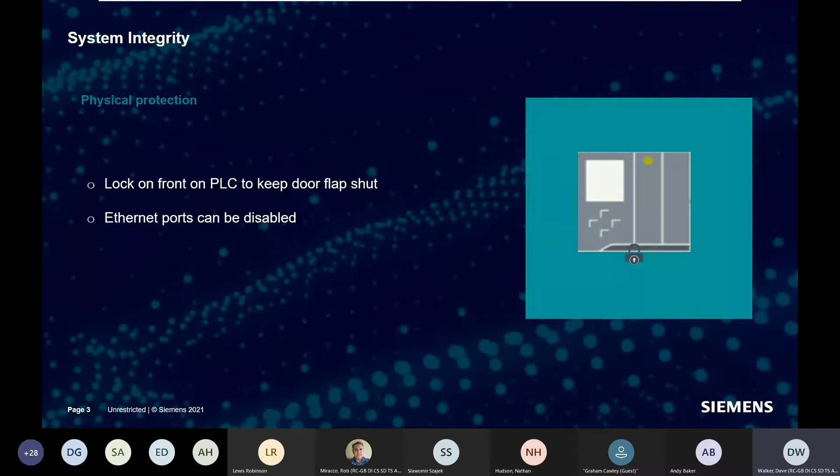We're then going to look at password protection. So we can password protect engineering operations onto the 1500, whether somebody can come in and take remote control, view the web page and everything like that. We can put access control on that. And we can even have access control for HMIs that want to connect into the 1500.

So we will look how we set that up and the changes we can make, and also we can change this from the program as well. So we can decide whether we want these accesses to be allowable from the program, not just at engineering time. So we're going to go through that.

We're going to look at if somebody does get into the 1500 as a further example of defense in depth. What you can then do is you can actually protect the individual code blocks inside your 1500. It's quite common that people who put a lot of effort into writing code blocks will protect the block anyway, but it can be part, again, of your defense in depth cybersecurity, that you can actually protect the code inside the PLC so that even if someone gets in, they can't make changes or they can't see how the program is operating. So we have the capability to protect the code inside the PLC.

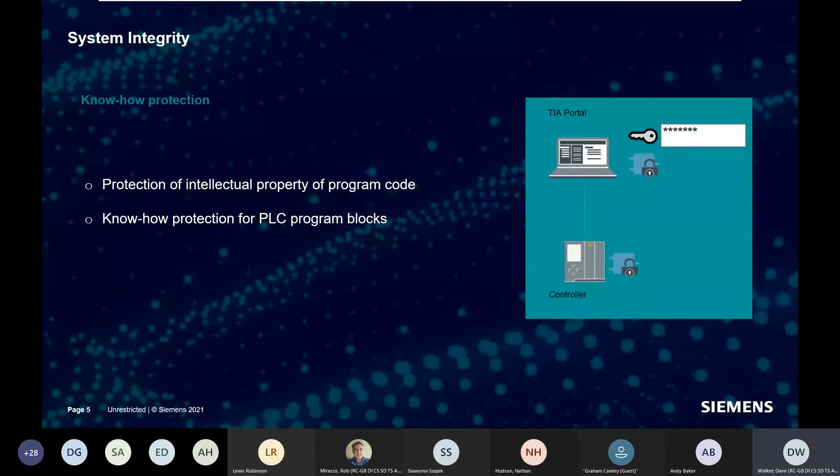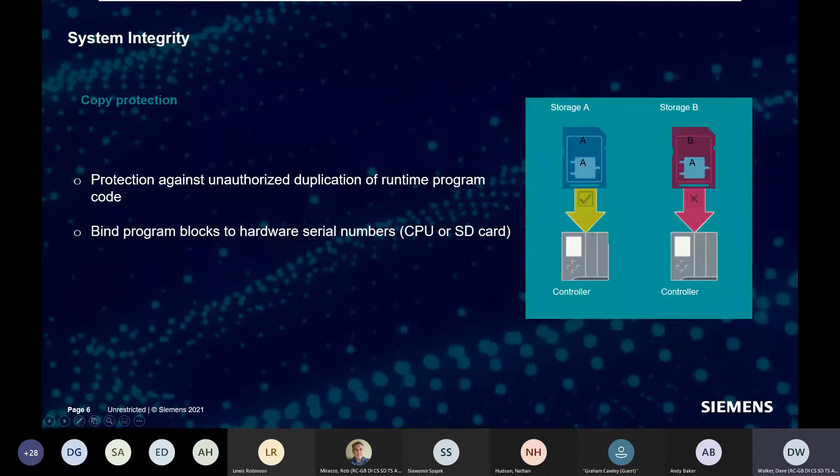And we can also bind the code to the PLC. This can be bound both to the memory card or to the actual PLC. So if someone tries to copy the code, they may be able to copy it if they've got through all the layers of protection, but then they can't actually run that code because it is bound to a specific memory card or to a specific PLC. So it just means that code can't be copied and then used elsewhere.

And then finally, what we're going to come on to is how do we communicate in a secure fashion. So this is passing data either up to a PLC, up to a PC, so maybe up into a factory system, so into a MES or an ERP, sort of factory management system, or even between PLCs. So we can do this as well in a secure fashion, and means that the data can't be changed, and also can be encrypted so that people can't read that data either.

Only the intended recipients will get the data, and they can also see that it's come from the PLC they thought they were talking to. So let's go and have a look at some of the setups and how we actually achieve that inside the TIA.

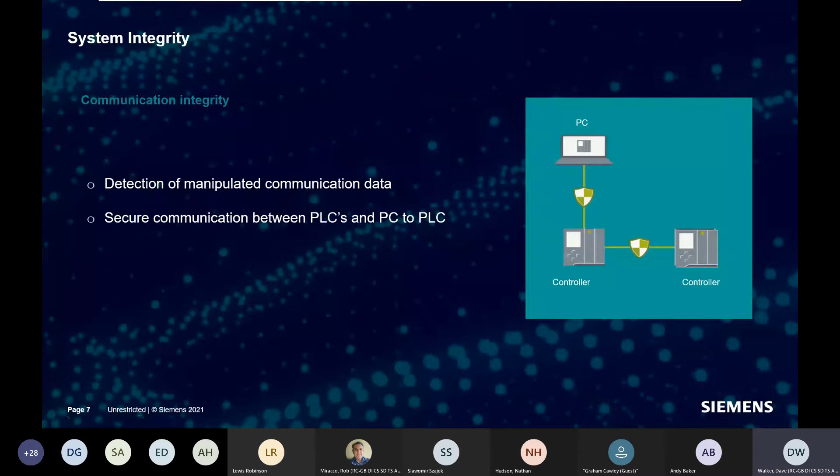So all I've got here is I've put in a basic project, I've put in a PLC, there is no protection on here. So I'm just going to go through some of the mechanisms that we can use to protect. And probably the most important, that probably most people don't do, being honest, is straight away into protection on here. We have the protection that we can set up. So this is enabling different levels of password access into the PLC.

So by default, we would have full access, and I would guess probably 90% of PLCs, when I look at them on customer sites, they're just left on full access. So anybody can go in, anybody can make changes, anyone can read the data, any HMI can connect to that data. By setting it up and moving it to no access, then the person has to know the different passwords to get to the different levels.

So even a HMI, you have to go into the connection on the HMI and give the HMI the password that enables it to talk to this PLC. So this is probably one of the best defenses you can just put on a PLC to make it secure, is just implement this password protection into your PLC. It then makes sure that even if someone's inside the network, if they don't know the password, they still can't get to the PLC. I've got it set at no access.

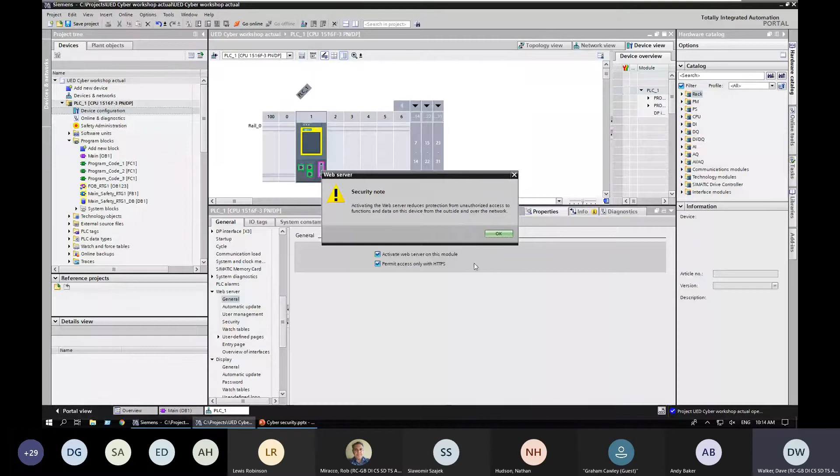You have to realize that by turning on the web server, you actually do decrease the level of security, because obviously it's another place that people can get into a 1500. But what we can do is we can activate the web server, which it will do here. So it does slightly decrease the level of protection on the 1500,

but then we can make this web server as secure as possible. So what we can do is we can permit access only via HTTPS. So this means that it is a secure connection from our web browser onto the 1500, so data can't be changed while it's traveling from the 1500 to the web page.

We can set up users. So at the moment, by default, it's set up for everybody as a minimum. Minimum basically means you can get onto the front page of the web server. And then what most people do, again being honest, is they go through and they tick like this, and they go, right, that just means anybody who now logs on to my 1500 can do anything they want. Again, not recommended.

What we would recommend is that you put a user in, and when we go into my other project, you'll see that I've set one up as an admin, as a diagnostic user. So this enables the user to go in. He can query the diagnostics. He can look at everything, like I might enable him to read tags, but he can't actually write tags. He can read watch tables, but he can't write to watch tables.

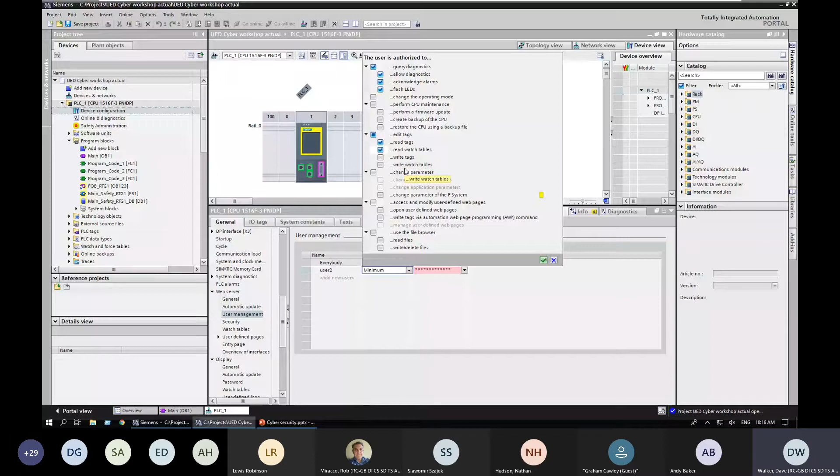And I don't allow him anything where he's going to be actually able to write down onto my 1500. So it just makes the web page as secure as it can be. So if I tick that, put the password in. That would enable that user then to log in, and we'll see an example of that when I go to my made-up system.

So that is the sort of hardware setup of a PLC, and hardening it up, where we've set up a password to get into the PLC. We've set a password onto the display. We've disabled any Ethernet ports that we're not using, and we've set up the web server so that it is allowed, but in a secure fashion.

So what we're now going to look at is actually program code. So if you want to further protect, because you've either got a lot of intellectual property inside one of these blocks, or you just want to make it so even if somebody knows the password and they've got into the 1500, they've then got to go a stage further to actually look at the program code. And this is very easy.

All we do is we go in and we can select know-how protection, and then what it asks for is a password that we put in to enable know-how protection. And that block now gets compiled up, and then it has a little lock symbol on it there. So that block now, if I want to open that block in the future, I need to know that password.

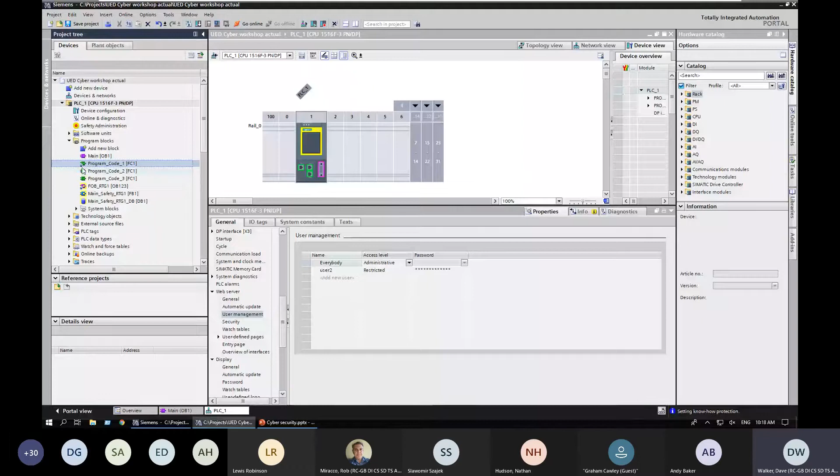So one thing that you will pick up from what I'm going through here is that it is important that you have a password strategy, and you probably use something like a password manager to store these passwords for you, because there is no backdoor to these passwords. So if you lose this password, then it is not possible to get back into that block.

So just be warned. I will recommend that you use a password manager or something like that to keep track of these passwords, because we do not have a way of getting back into that block if we lose the password.

A further thing that we can do to our block, if we right click and go into properties, is under protection, we can put on binding. So this is where we bind that block to either the serial number of the memory card, or to the serial number of the CPU. Okay, so if I say I want to bind that,

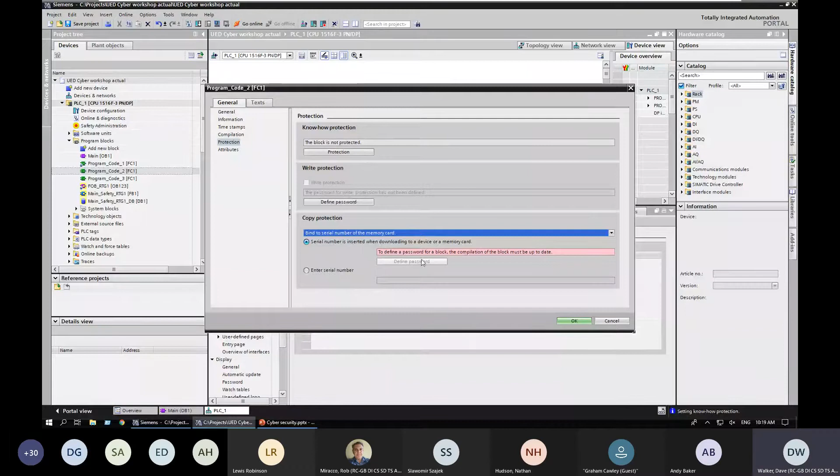I've not compiled it, it's probably because there's no code in it. If I compile a block, no, it's because I haven't put any code in it.

But if you just go with this option here, when I go to download that block into the PLC, it will automatically take the memory card number, so you don't have to. If you have the PLC available and you have the memory card there, you can just say on this download, bind it to that card.

That means if the person comes along and then does an uplift out of the PLC, it will have that binding to the memory card. If you actually want to protect it in the project, what you would do is you would enter the serial number here. So you would read the serial number off the memory card, you would bind it to that, and then you would know-how protect that block so that they couldn't then get into the properties of that block to be able to change that serial number.

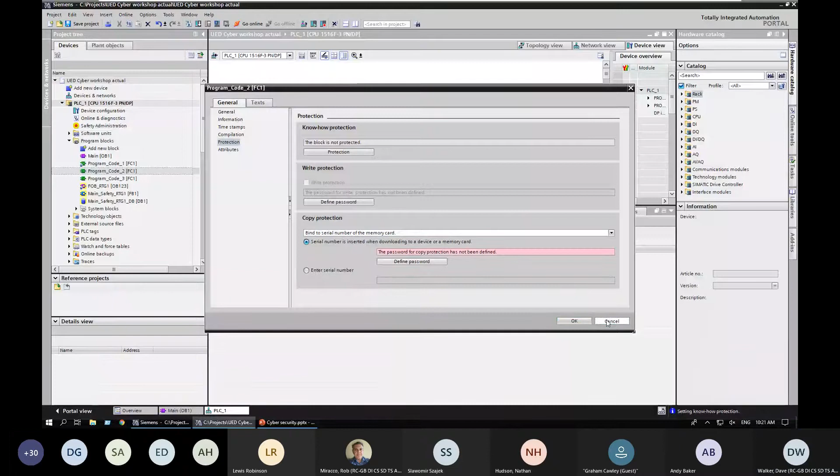So it just depends. If you've got the hardware available, you're just doing a download and you don't want people to be able to uplift the program out of the 1500 and run it on another PLC, then this is the option for you. If you haven't got the actual hardware, but you've got the memory card number, you can put that there. Again, put on the know-how protection to stop somebody being able to go in and look at that or change it. So that's binding and looking at all of the uses.

As you've seen, I've been putting in passwords and I've been changing my project, and everything that I've been doing so far is to protect the actual PLC and code while it's in the PLC and while it's being used. But we have also got this project, and there is an inbuilt mechanism to actually protect the project and give people different rights while they're using the project. It's also necessary to use this for setting up communications and OPC, and the certificates that we use to ensure that our communication is done in a secure way. So there is a setting down here inside TIA called security settings.

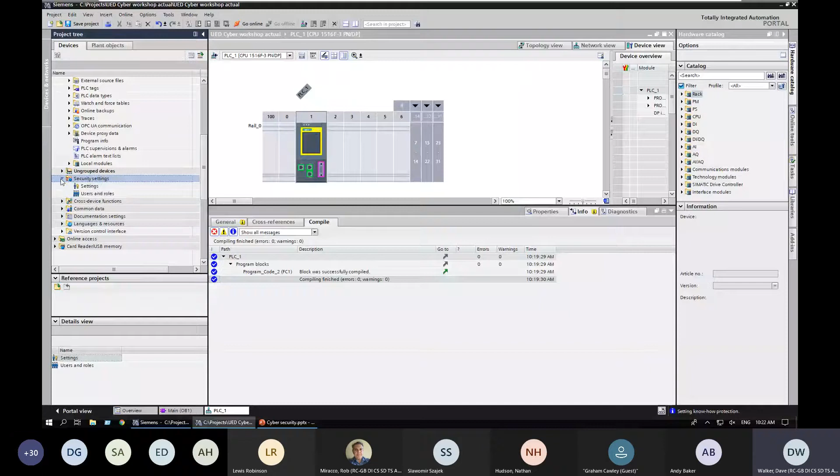If we go into that setting and we click this button, it now asks us to create a user and a password. I use a standard user for myself because I do a lot of this sort of protection. So inside my projects, if I have a protected project, I know one of my standard usernames. That means that I can get into the project, because this cannot be undone. Once you've protected a project, you cannot then remove that protection. So to now get into this project, once I press save and exit, I would have to know that username and password.

Now we've actually created that. I've created my standard user. Inside here, we have some pre-built standard roles that have been set up. We can actually go and have a look at this. So we have an engineering administrator, and we allow an administrator to open the project with read write. We might create a diagnostic engineer, because the engineer can still open a project with read write. So we might want to have a maintenance role.

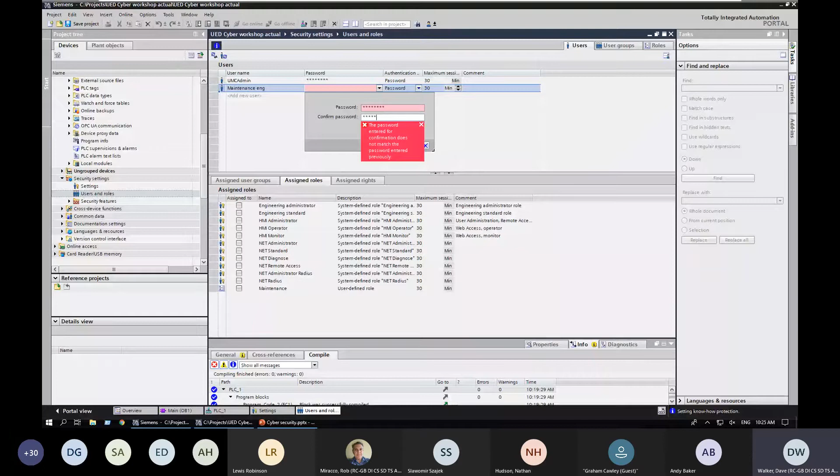It would help if I could type. And I haven't got an uppercase character. It's one way of filling the time up. Not type passwords incorrectly.

There we go. So I now take that user and I assign him to the maintenance role. So that means now that even on my programmer, when I open the project, I will be now given the maintenance, and I log in as my maintenance engineer. I enter the password, and then that will only allow me to do what is defined by the maintenance role, which, as we've already seen, is it gives me read-only access into the project.

So what we've also got in here is if we have a CP card, which is an inbuilt firewall, we can actually set up the firewall, which is direct onto the PLC. So that's what Andy was going through, but he had a separate firewall. We can build the firewall onto this PLC. We can set up VPN through the CP. We can set up a time server on here as well. And we have a certificate management, which is what I'm going to come on to now.

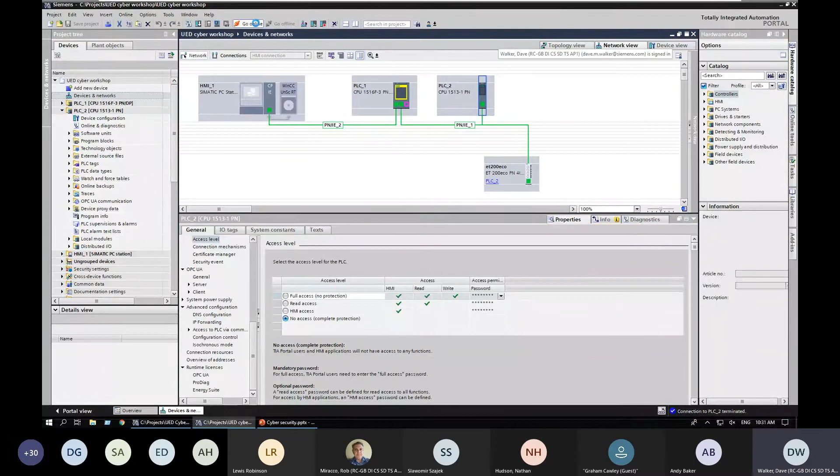If I go into devices and networks, if I click in that, and ask to go online, it's now asking me for my password to go online. So it's a fully protected project. Once we're online, if I go offline, and then I ask to go online again, it will just take me straight online, which was the problem that I had before.

It wasn't timing out. So that's just to show you that if you put this protection on, it's not a constant entry. I've entered my password once to actually come into the project, and then I've entered my password once to go online to the PLC. Security always makes things slightly less easy than if there's no security, but we're getting all the benefits of protection if someone is trying to cyber attack into a PLC.

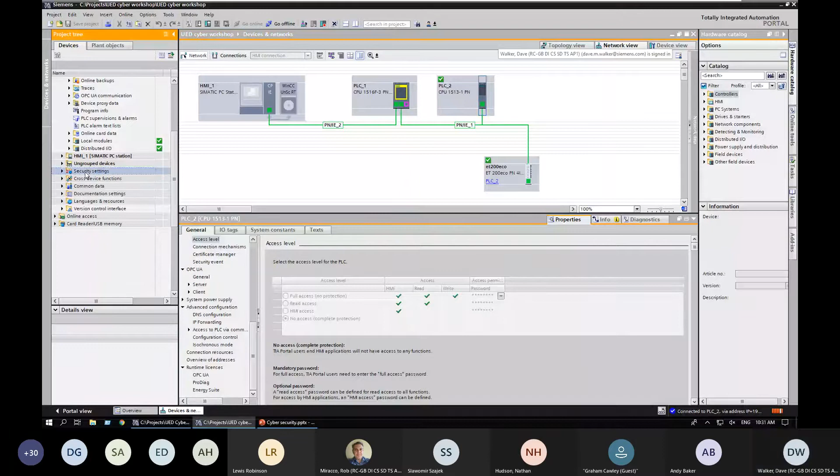What I have set up, as you've seen, it's a protected project. So in my security settings, I have got some users. I've built a user, which is OPC user 1, and this OPC user has the assigned rights that in runtime, so it doesn't have any impact on engineering, they are allowed access into OPC clients and servers. So they have server and client access on both PLCs.

So this is a really simple way, without having to remember users and passwords everywhere. You can put one user in and you can assign them rights across your projects. Because what we're going to look at now, if I go offline to here, is how we can do communications in a secure fashion between a separate piece of plant, so a factory system, maybe another SCADA or a MES or something like that, down onto a 1500 if we've turned off PUT/GET, because this is in no access.

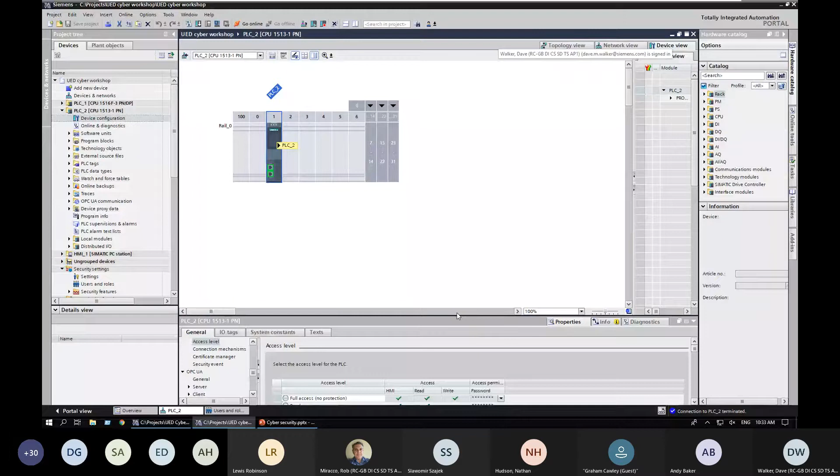So the mechanism that we're going to use is OPC UA. So we're going to set this PLC here as an OPC UA server, but we're going to make it secure so that people can't just browse onto it with any client. So what I've done is I've activated the OPC UA server on this device. I have turned off the standard interface, and I will show you this when we browse into this PLC. By default, this standard interface is turned on, and by leaving it turned on, what you in effect do is open up all the data inside the 1500 to your OPC UA client.

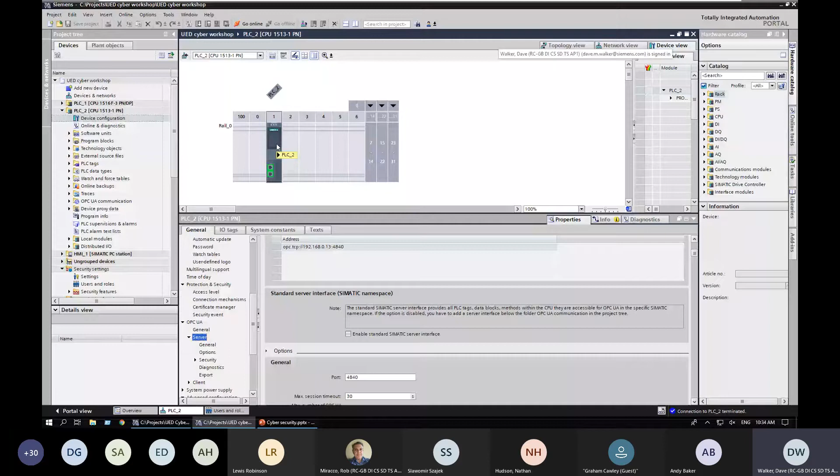It can go in, it can look at all your inputs, all your outputs, all your data blocks, if that's what you've set up. So the recommendation is that by default you turn that off, and then you build a separate server interface, which I'm just going to briefly show you how to do.

I have left it all at standard default rates. It has created its own certificate, so it's created a certificate for the server. I have turned off all but the highest level of encryption and signing of the OPC server. So I've removed any no security and lower levels of access.

My external application has its own certificate that I have imported into the PLC. So by importing this, I've said that this is a trusted application that I trust to come and read my data. That has come out of the OPC client application. That again could be SCADA, could be your MES, could be your IT supplying you with that certificate. You put it onto the PLC.

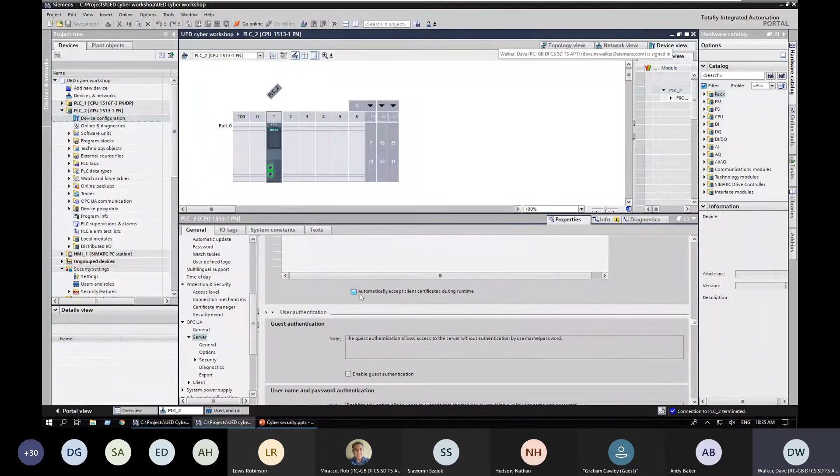I've disabled accepting any other client certificates, so it's only looking at that client certificate. And I've said to come in and use me, you have to have a username and a password. So there are 2 users and passwords. I've set up another one here called admin, but because up at the top I've also said enable user management via the project settings, I've got that OPC user 1.

So because I've set all that up, if we now go to my client application, I open up my client. If I go first of all to my unprotected PLC, the one that I've done no security on, I can simply select none. It connects into the PLC. I tell it to go online. It's gone straight online to the PLC.

I can go into the PLC. I can go into global data blocks, I can get all the data. I can go into instance data blocks, I can go to all the data. I don't think I've actually got any inputs set up, but if I did, I could go to inputs. I can go to the memory area of my PLC. I can bring that in because there's no protection on this. I can turn it on and I can write data into my PLC.

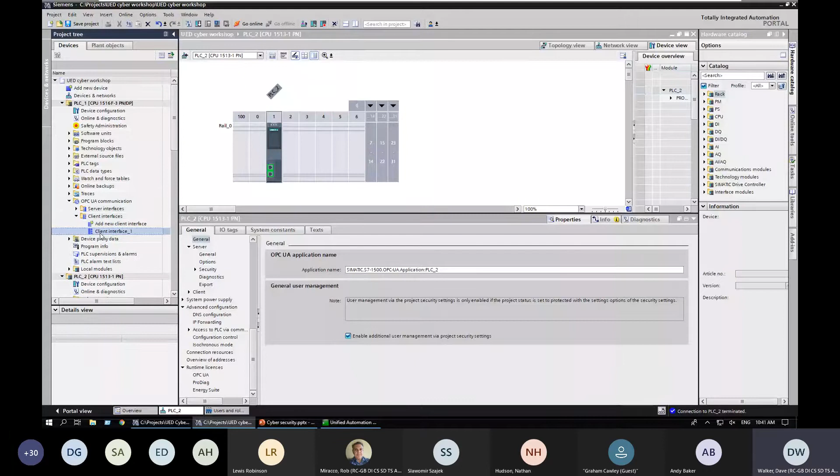And what I've done here is I've set up a client. So on my client of my 1516, I've said I want to read data. This is set up in a very similar way. We can go online access. So I want to go to 192.168.

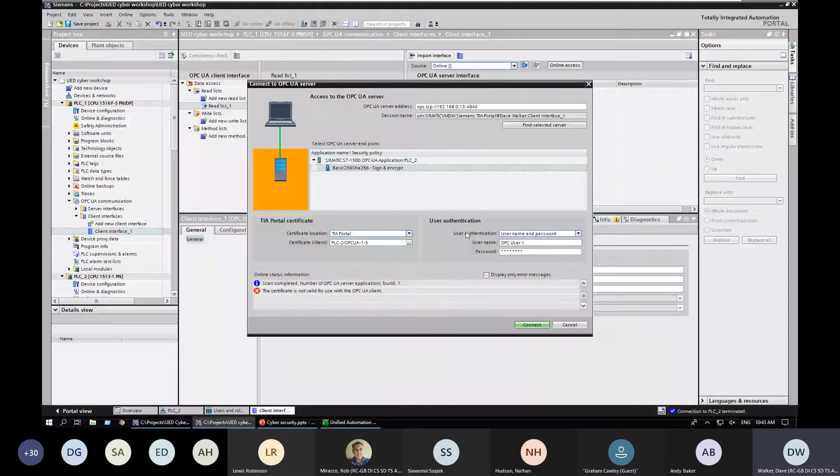So the setup, I've used the wrong certificate here, but if I had picked the right certificate, it would have connected on, and then what it would have allowed me to do is just drag and drop values out of the setup. And then also inside here, I have actually set my security up. So what you can see, I've set the same security, OPC user 1. I don't need to know the password because the OPC user password is set up through the entire project. So as long as I put in OPC user 1, it will allow me to connect. So it's the same setup here that I made in my Unified Automation client project.

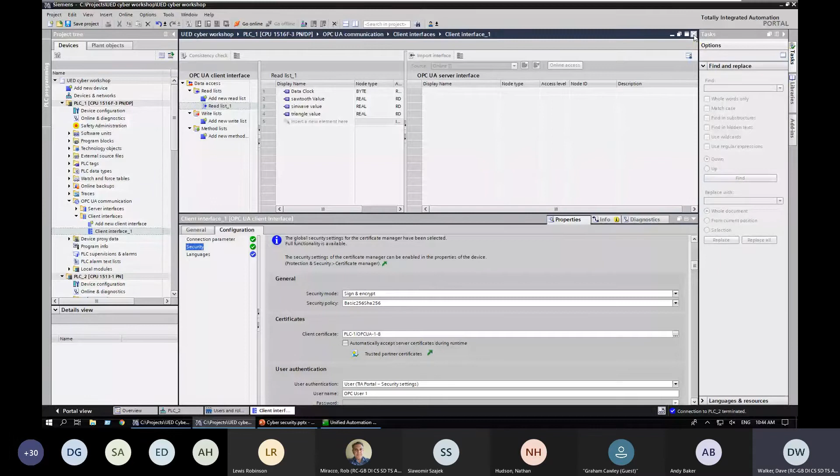Once you've set that up, you can then pass data in a secure fashion from PLC 2 to PLC 1. So that's using OPC. OPC is very, very secure, as you've seen. However, there is one disadvantage that most people see. If you want to use OPC, it is a licensed option on the 1500. So you do have to purchase a license for each of the PLCs which are acting as either a server or a client. So people also want to pass data between PLCs in a certified fashion, but they don't want to use OPC and they don't want to use put-get because that's insecure.

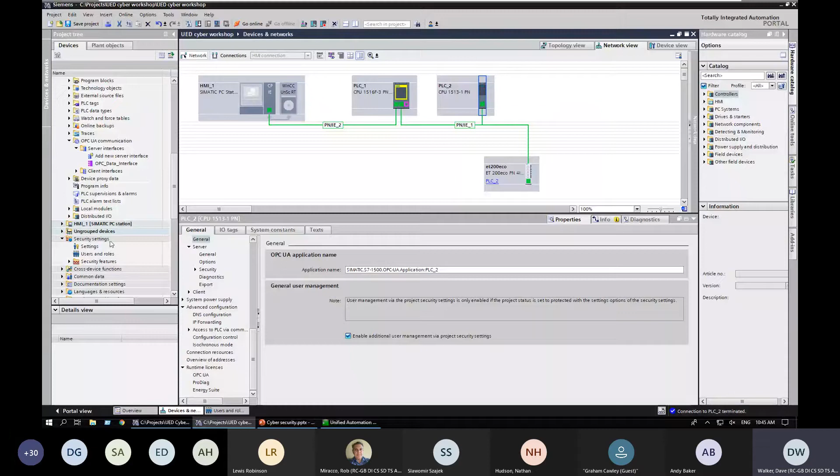So we do have a second method of passing data between PLCs, and it's called Open User Communication. Open User Communication now allows you to set up a secure connection between 2 or more Siemens PLCs, and it's all done inside TIA and it's all integrated in. So for this, we have to have a protected project to enable us to do this secure communication, because to fully make it secure, we have to use certificates in each of the devices. And we only get access to our certificate manager if we protect the project.

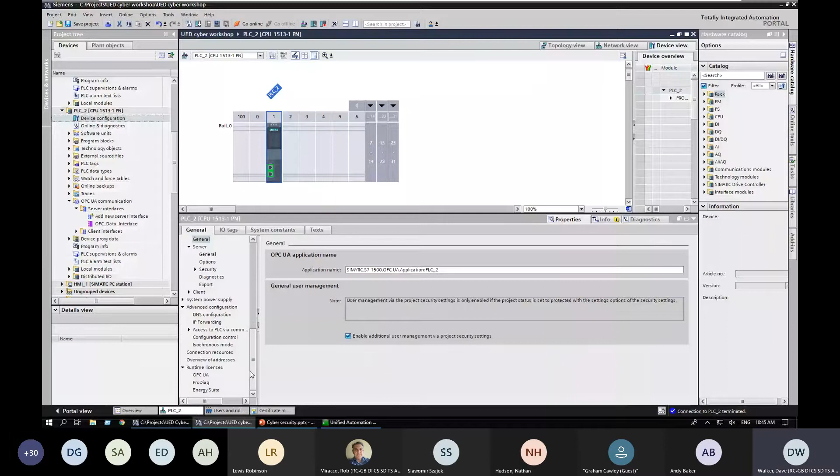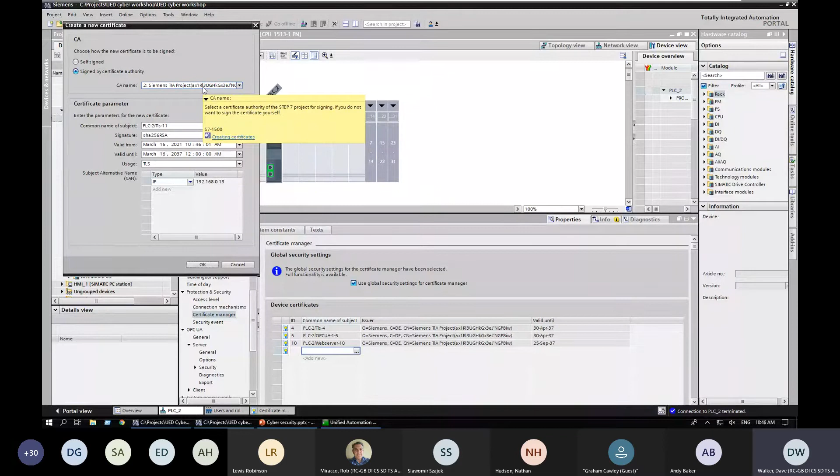So what I have actually done is I've set up my certificates. So where do we set up the certificates? If we go into our project and we go into the configuration, what you will see in here is on each of the PLCs, we have a certificate manager. I can click in and I can add a new certificate. So as part of every TIA Portal project, it comes with its own certificate authority. I'm not going to deep dive on certificate authorities, because that's probably an hour in itself, and this is just an overview. We can run a further session if you want me to fully go through certificates.

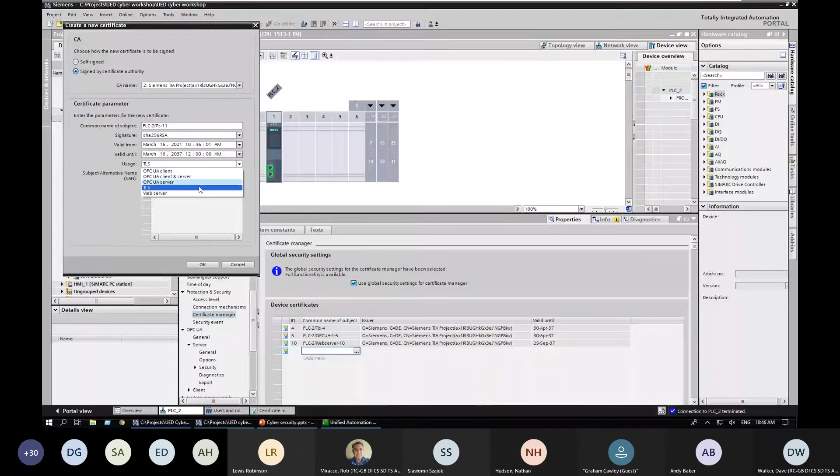However, I am going to create a certificate based on this project's certificate authority. You can create an OPC client and server certificate, which is what I created for my other. I can create a web server certificate, and I can create what we call a TLS certificate, and this is the one that we use to do the communication between the different PLCs. I'm going to cancel that because I don't want to create a new certificate.

But if we go back into our global certificate manager, what you can see here is they've all got a number on them. So we have used number 2 as our certificate authority. And then on our devices, I have got a number 3 and a number 4, where 3 is the Open User certificate for PLC 1, and 4 is the certificate for PLC 2 for Open User Comms.

We then use the standard Open User Communication block. So anybody who has done Open User Comms, it is a standard block that we have, which is a send and a receive. We have a send on one end. This is the receive end. So we can see here that we have our block. On the receive end, you simply say that you want to enable it to receive and you want to connect. So this is all you have to do on the receive end.

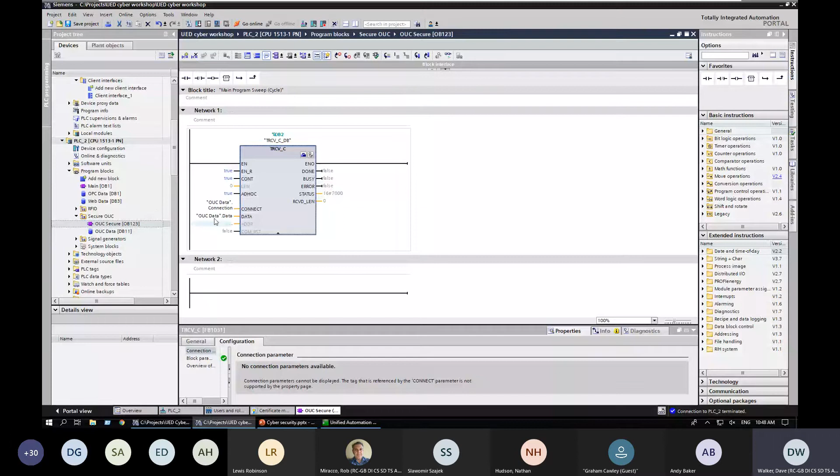You then have a data block where you store the connection details and the actual data that is being transferred. So if I go into this data block, if you were doing standard open user comms, you would just use a format of data which is TCON IPv4. Because we want to do all this securely, we are using the secure form. So this is a pre-built, you type that in and it automatically brings you this down. These are the standard parameters. So this is where I am putting in the IP address of the PLC that I want to talk to.

So it's very simple. As I say, we can run a seminar and we have already run tech talks on setting this up. However, today what we're looking at is the secure form. So it's got these additional bits of data. It has got that we want to use secure communication. And in this particular PLC, number 4 is my certificate, which when we were in the certificate manager, you saw number 4. And we are using the certificate authority number 2. This certificate was created from this certificate. So you just put 4 and 2.

If I go to the other end of the communication, if I go into my secure open user comms and I look at the data block, what you can see in here is that I'm using the same certificate authority, which is number 2, and I'm using the certificate in this PLC as number 3. So those came out of the certificate manager. You just go in there, you create your TLS certificate, it gives it a number, and this is the order that you put them in, and that then forms up that communication.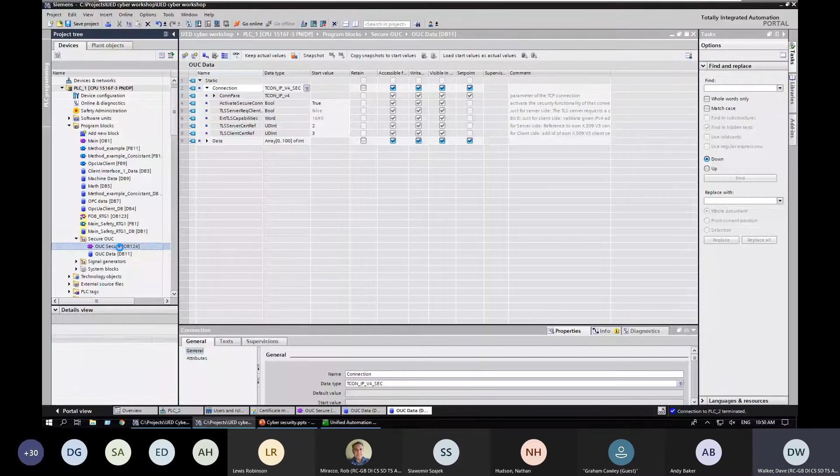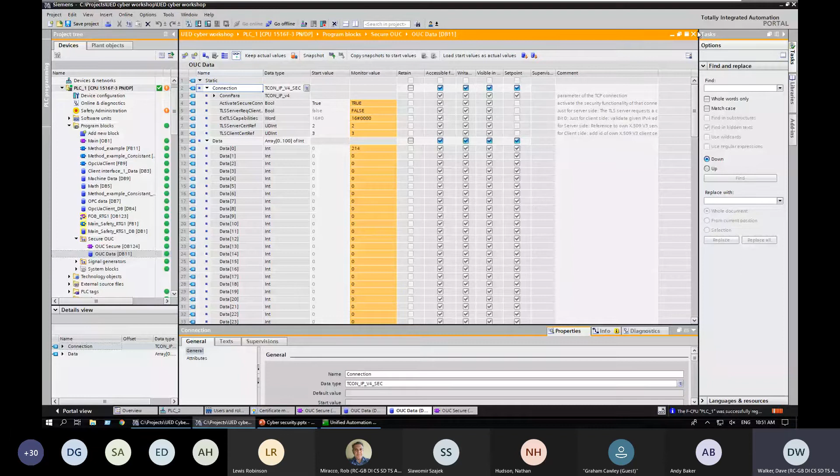So what we will see, if I actually go online, again, this is an insecure PLC, so it didn't ask me for it, but you can see that this is just communicating away, it's just going as fast as it can, and it's just sending data from this PLC. The data it's sending is in our data block, so I'm sending a couple of bytes of information here from this PLC over to the other PLC. So it's simply doing a T-send straight over to the other PLC, but this is a fully secured connection.

The 2 PLCs recognize each other. They've got the certificate set up, and say that the data cannot be changed between the PLCs. So the data that leaves here is the data that arrives at the other PLC, and you can't send it from a third PLC and pretend to be this PLC, because all the certificates and everything are set up.

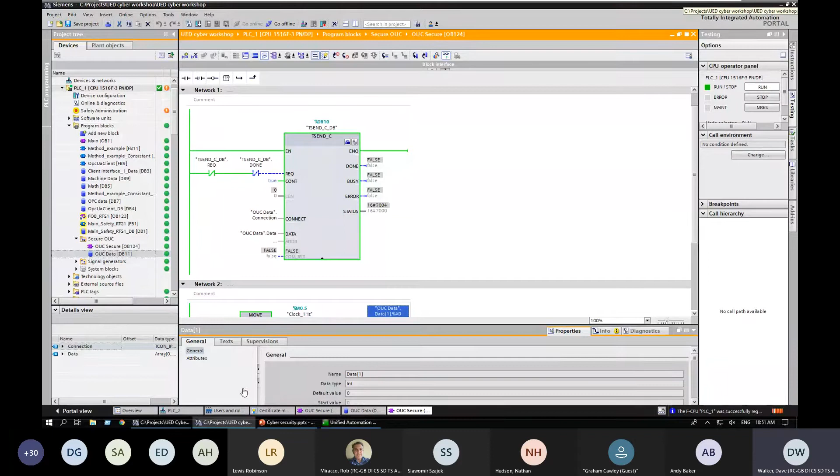So if somebody has tried to get in to the web server, you're getting that log on. You will also get told if somebody has tried to get in to the PLC but has failed.

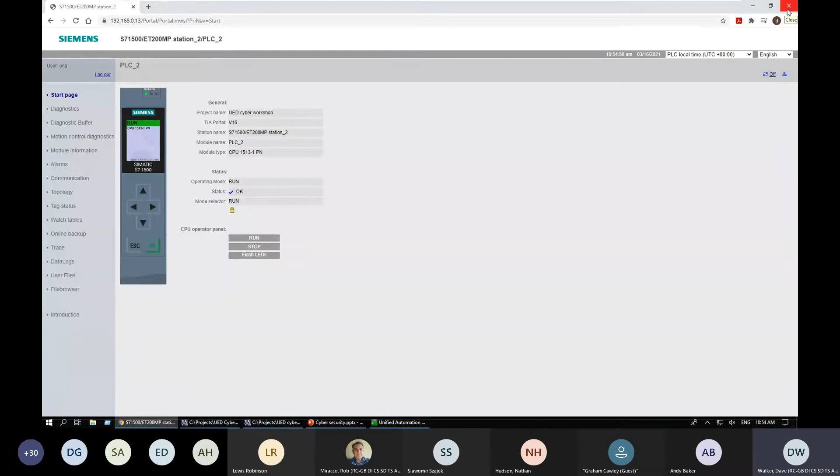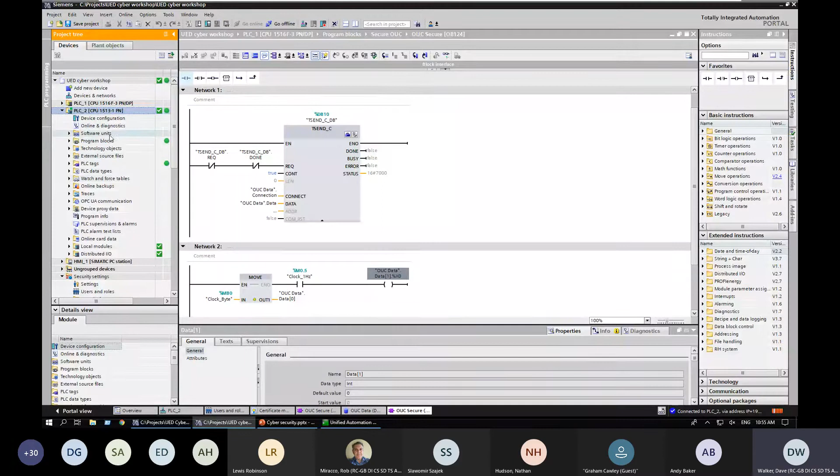And the final thing that I'm now going to show is how we can actually set this up so that it only works if there is, say, a physical action on an external connection. So let me just go offline to PLC 1. So at the moment, we've got PLC 2. I can go online because I've already put my username in. So you can see here that I've got online. I can go into my program blocks.

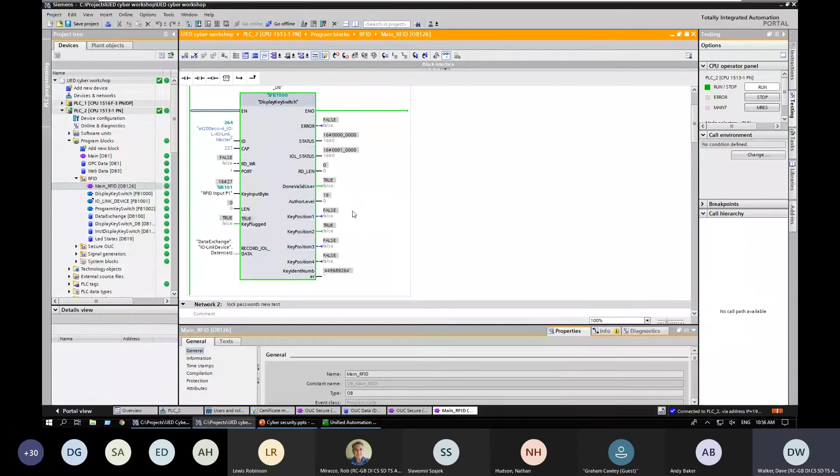I have got in here a bit of code. Let's go online to that. So this is a standard RFID switch that we have. It's a key switch which is driven by RFID. So I have to put an RFID key into the key switch. It's a little RFID chip. And then I'm allowed to turn the key switch to one of 4 positions, depending on the authority of the key switch. So what we can see here, this is an authority level of 19.

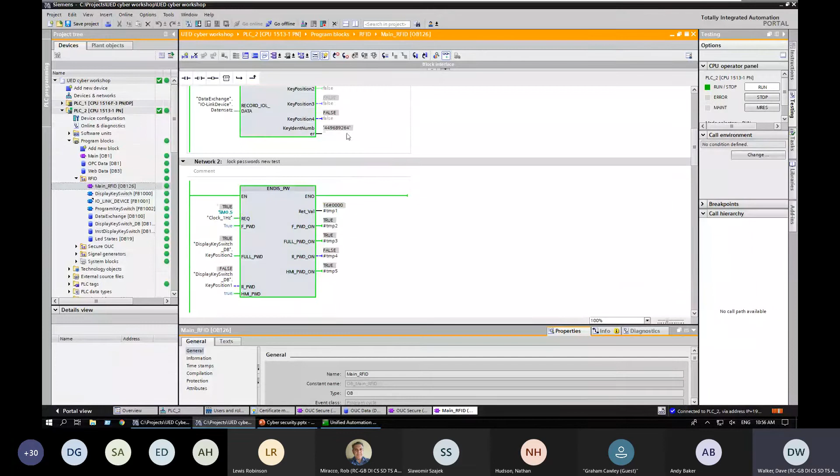It's a very high authority, so that I can actually move that to any one of the 4 positions, and it will turn on the key switch to the authority level it's been allowed. I've then used this inbuilt block here, which is ENDIS password. It's a standard block. And what I can now do is, depending on where that key switch is positioned, I can enable or disable the password. So you've seen I've typed my password in that allows me to have read-write access into this system.

So if I go offline now, and if I move that key switch or remove the RFID, if I now try to go back online, it's now asking me for the password. If I put in the password that I know should be good, because the key switch is not in the correct position, it's now telling me that the password is currently invalid on the device. So this means that remotely now, I cannot get onto that PLC. I have been locked out of that PLC. Somebody physically at the PLC or via an HMI has to allow me to get onto that PLC.

We can set this up so that, let's say, I can allow read-only access. So at the moment, you'll have to believe me because you won't see the password I'm typing in. But what I'm going to do is type in the read-only password. So it's let me put in the read-only, so I can now go on and do diagnostics.

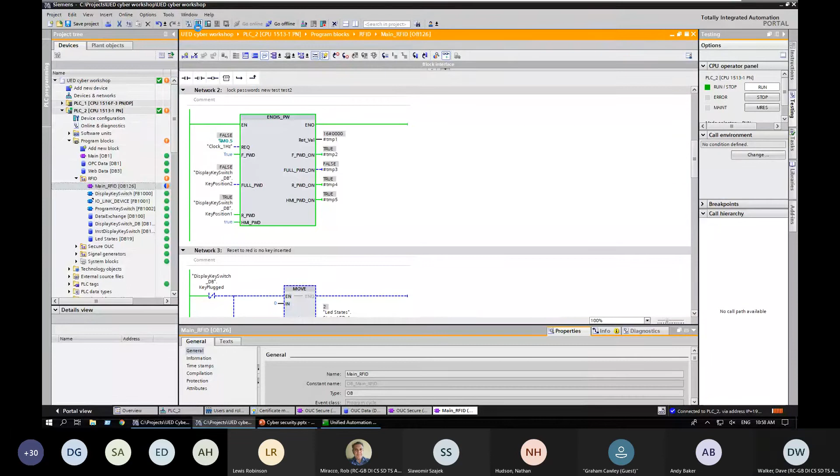If I was now going to make a change on there, and I said I wanted to download that, it will compile because that's been done offline. But now it wants the password because that was a read-only password that I gave it. So it's not going to allow me to download. And again, even that read-only password has been enabled by the position that the key switch is in. So what I need to do is move my key switch to the correct position.

I will now enter the... it's because I've changed the password halfway through. So let's just go offline.

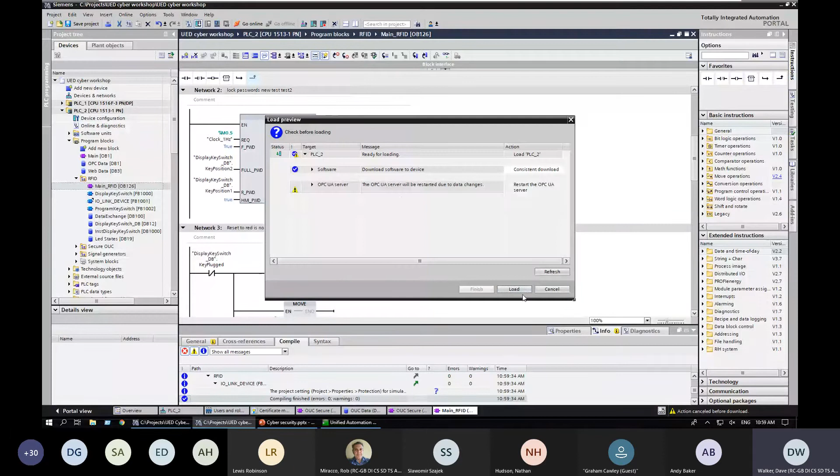Now go download. So it's asking me for my read write, and you can see now because I've entered the read write password, it will enable me to do that download. I can now go online like that because at the moment I am connected for read write access.

If I remove my RFID key, so I walk away from the project and I remove my RFID key, it automatically knocks me offline. So anybody coming up to a laptop can't now make a change to that PLC or download it. So it's a standard block. It's just inside our standard instruction set under program control, runtime control, ENDIS_PW there.

So it's just a way that you can further enhance the security on the 1500. I've done it with an RFID key; that could be a physical key switch on the outside of the panel. So again, if you've got remote access onto your site, but you don't want somebody just being able to dial in and then make changes on the PLC without your knowledge, you could have a key switch on the PLC that will block all the passwords until you put the key switch into a program position to allow somebody to make a change onto the PLC. So it's just a block that is further there to enhance it.

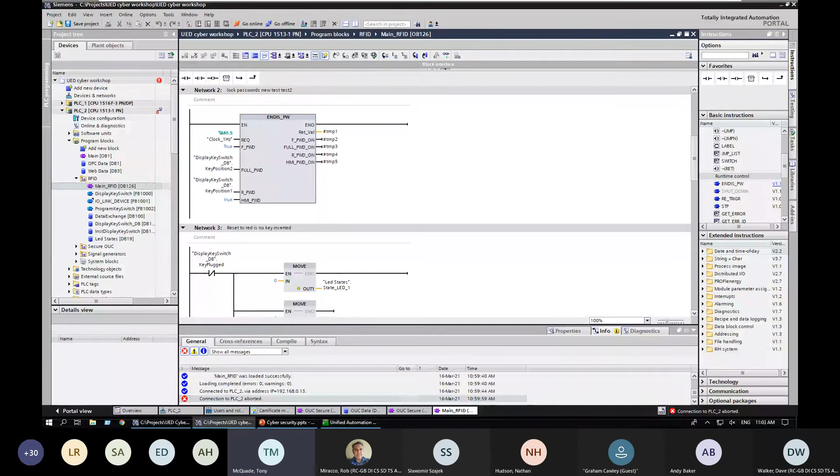Yeah, the only other additional one, I'm working on a project at the moment and the customer has, they may not know what they're talking about, but specifically asked for HMI hardening. So like you've shown us through the PLC there, are there options to block ports and enable security on the HMI? There are on a HMI; this was specifically aimed at 1500. But yeah, of course. I'll pass back to Ben unless there's any other questions, and then right at the end, if you just hang on, I will show you explicitly what we can do with the HMI, and anybody else who's interested can call. Okay, yeah, that'd be great. Thank you very much. Any other questions, or I'll hand over to Ben?

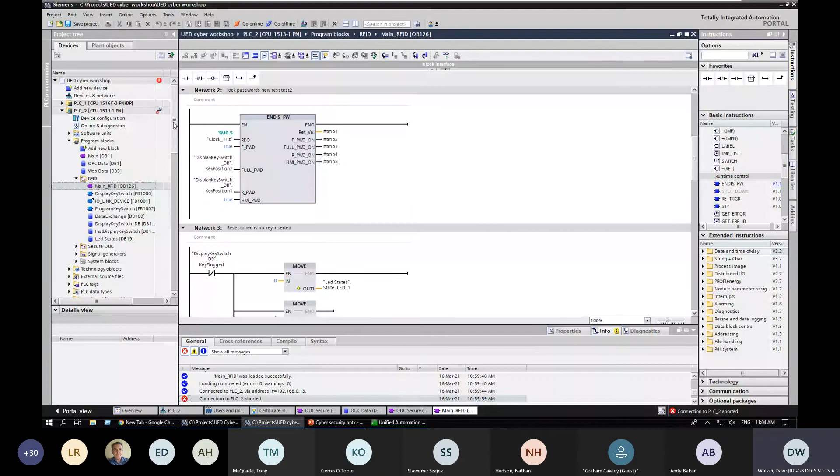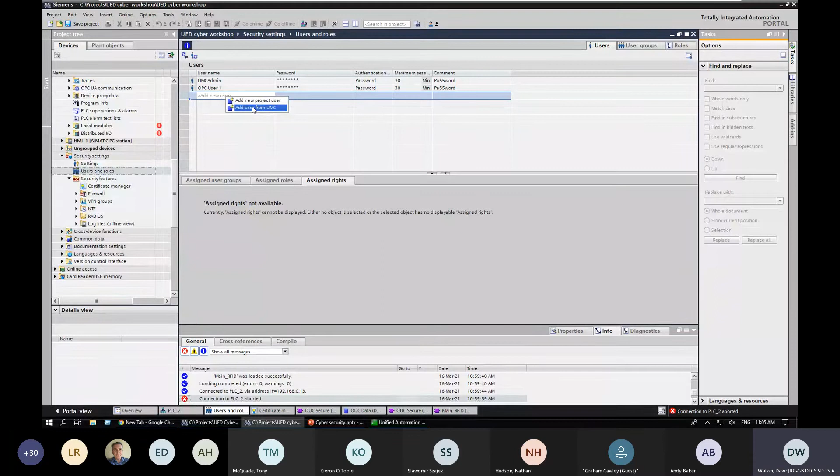Hi there, it's Kieron O'Toole here. Can you hear me? Yeah, brilliant. All I wanted to check was with the PLC hardening and any other hardening, is there any way of linking the password side to the Active Directory accounts? So right. I haven't got an Active Directory, but if I go into my users and roles here and I go to add a new user, we do have this option, which is add user from UMC. So the UMC is an add-on to TIA, and that is User Management Component. User Management Component will actually link the TIA into the domain server. So all the passwords and users and roles can be set up from a domain server.

Now, I haven't got full detail because we haven't seen it yet, but I have been told that this is going to be further enhanced in V17 to then be able to set up some of the usernames and passwords and access levels that I've been showing you today. You'll also be able to use the UMC, so the User Management Component, to set those up to link those into a domain server as well as part of the V17 update. But I can't fully commit to that because I haven't seen it.

So then at the moment, that's brilliant to hear, by the way, but as far as having a single username and password that's consistent across whatever applications are being used, is it that we could take the Active Directory and link it in through UMC and use that for the permissions right the way down to the PLC hardening? So you're referring to, for God's sakes, don't forget your password. That all sort of disappears at that once.

If you want to, you can do it all through UMC, which we can do at the engineering level. So all this, the setup of getting in to the project. So when you open the project, if you were logged into your Windows PC with your Windows username, it will actually automatically open that project if you're logged in correctly, because it would recognize you as a Windows user. As you're the user, you have access into that project. So all of that level goes away.

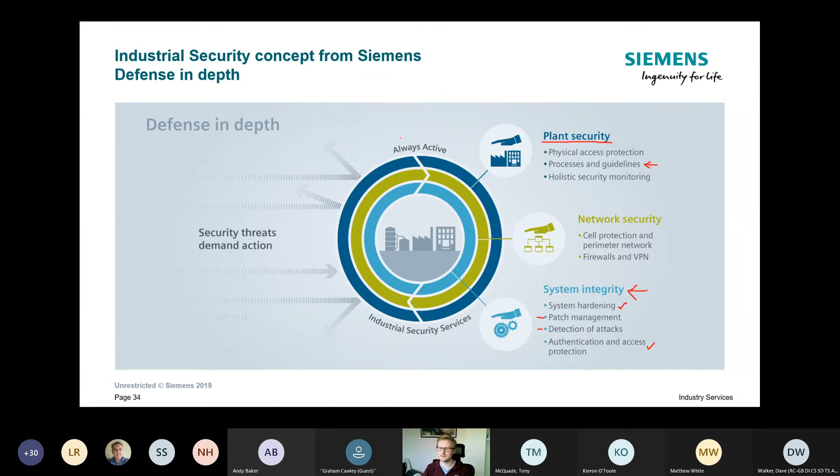So really what we're trying to say here is that there are a lot of different considerations to take when you look at building up this defense in depth concept, but really it comes down to having those independent levels of security. So this is quite a nice way of visualizing it and getting your head around the basic concept. What we're trying to do is move away from this idea of having one single layer of defense. So this could be air gapping a system, for example. We talk to a lot of customers where that's their default position when it comes to security and this single layer of defense.

It could be installing a single firewall, for example. But whatever that single layer of defense might be, the issue is that once you've overcome it, you're into that central part of your OT system and you're able to potentially deploy those threats. So that's where we have potential issues. What we're looking to move towards is a system where we've got, again, these independent levels of security, so that if somebody gets past your external defense, you've still got multiple other hoops to jump through to be able to get to the part of the system that you're aiming for. This is really, really going to deter those attackers.

So I also wanted to address the fact of why listen to us, why take on this idea of defense in depth, and I really wanted to explain where the ideas come from in the first place. So this defense in depth concept that Siemens has put together is directly based on an international security standard. So you may have come across it before, and if you haven't, it might be something that's worth spending a little bit of time looking into if you're interested in the security topic, and this is the IEC 62443 standard.

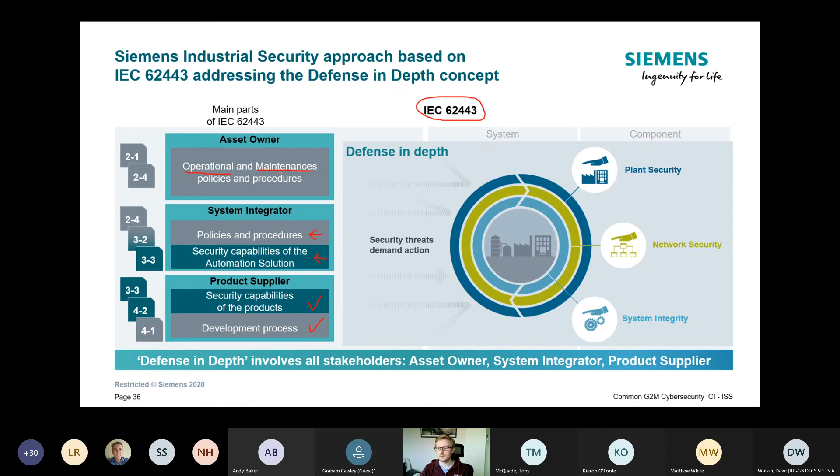So that was the first thing I wanted to point out, the fact that there are these three groups of people that all have to work together and all have to take their responsibility for security really seriously. The second thing is this idea that you can't just throw technology at the problem when it comes to security. And you'll notice here that policies and procedures have come out quite a few times in what I've been talking about. So a nice way to look at this is to kind of summarize the three main aspects that make up a secure solution and a secure security program.

So the technology is one part. Yes, it's really important. We've been seeing from Dave how you can implement some of these concepts, and you need that technology to be able to create a secure solution. Equally important are your processes around the way that your company and your design process as well is governed around security, but also your people and the training of, from the end user's point of view, the operators on the factory floor, the engineers who have access to the OT equipment, but also everybody else that's within your organization and could potentially have an impact on the security of that system.

So we wanted to explain to you how we're trying to make this easier for people to implement, because we realise that security is a topic that's been around for a while, but as we're starting to discover, there's a lot of aspects to it and there's a lot to take on. So we wanted to show you how Siemens are trying to make this as easy as possible. So we make this defense in depth concept real in two main ways. The first one is all about building security into those products, and that's what we've been hearing from Dave this morning. But on the flip side, we also have a team, which I'm part of, which is there to really support customers on this topic of security. And we're there for a few different reasons.

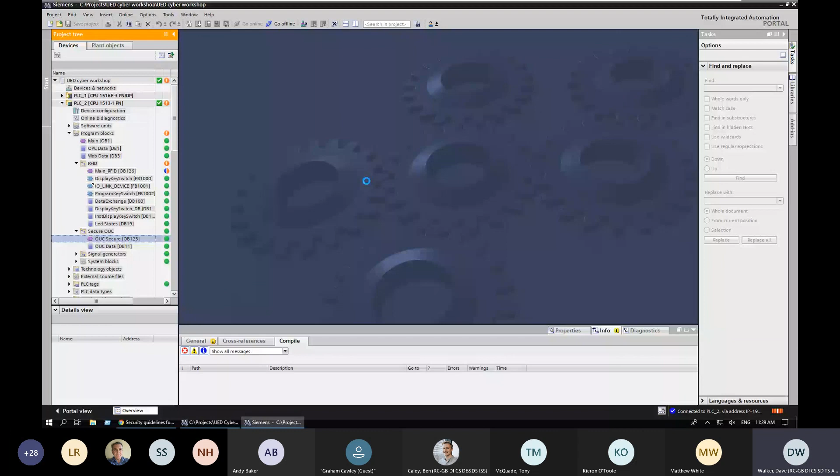I can't actually, as a maintenance user, change a block anyway, because I have read-only access. I can still go into a block, and I can go online to a block, so I can do diagnostics. I just can't make any changes to the blocks, and I can't download a changed block. But as a person who's only got read only, I wouldn't be able to change the block anyway, because everything is grayed out and I can't get to it. So those were those two questions.